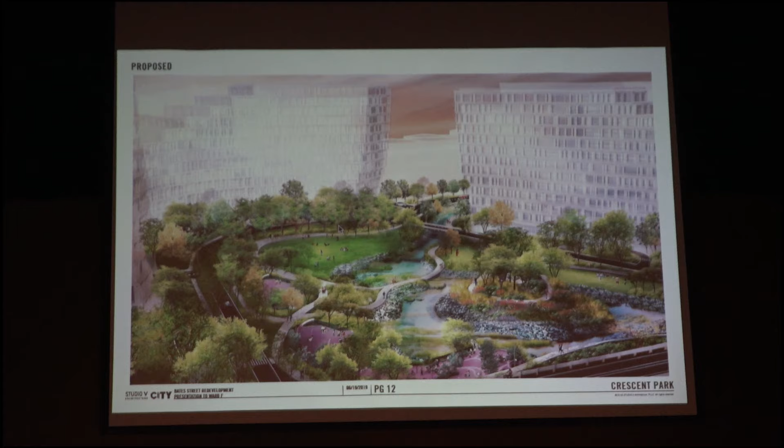Please keep going. Now there are other neighborhoods that are a little further afield. If we look at all of them, there's Paulus Hook, which also has some of these historic characteristics and comes up towards the waterfront and so forth. So we really try to look at each of these communities, and one of the most important things in my practice and designs -- I'm glad to talk with you afterwards, answer questions, show you other examples, go to our website -- is that we do a lot of work reconnecting communities, taking edges, taking gaps, and reconnecting them. That's what we'd like to do here, and what we've been asked to do.

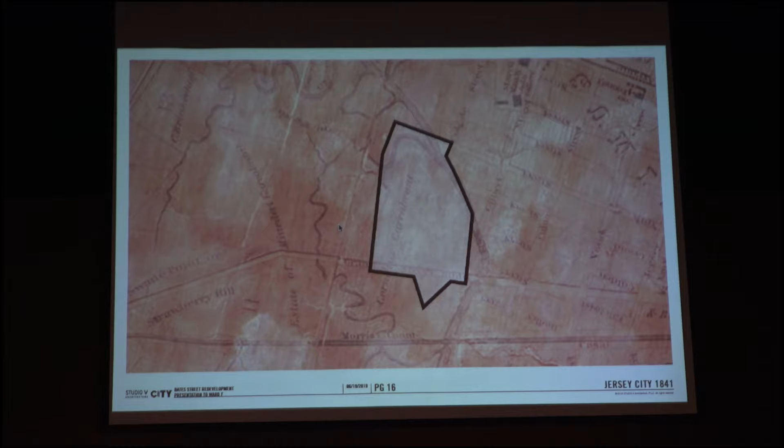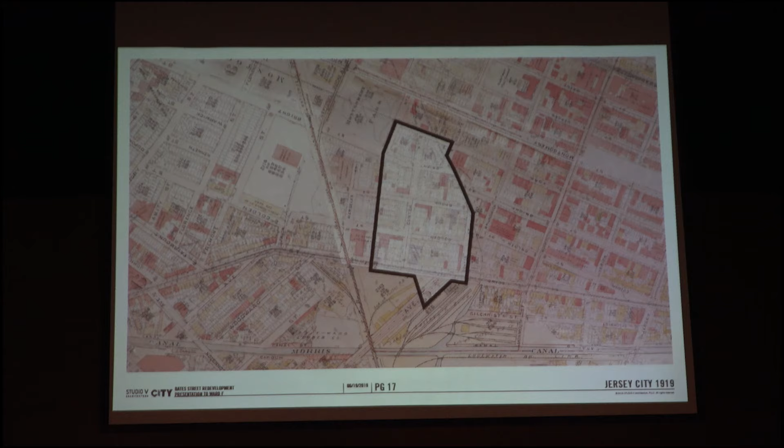So we look at the history. This is Jersey City in 1841, and this site used to be kind of on the edge of the city. As a matter of fact, 8th Street was where the Mill Creek used to be, so it actually used to be a waterway. Keep going, Olivia. Then by 1919, the fabric of the city went right through -- it used to be connected. The blocks went right through, and the fabric of the houses and buildings actually continued through continuously.

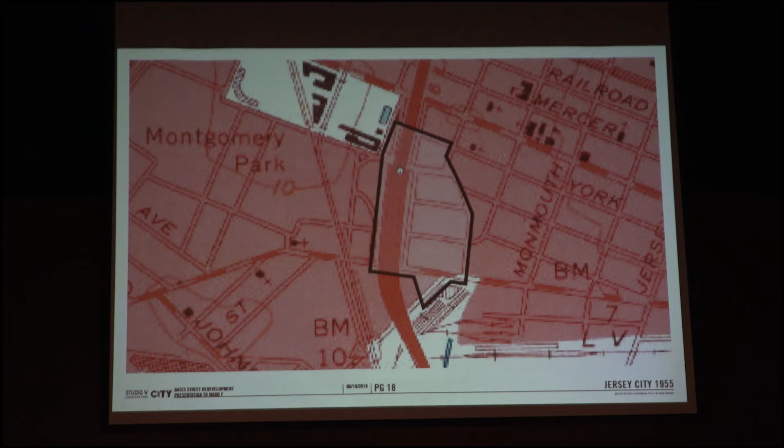Now, by the time we get to 1955, there's a significant park in the upper portion. The park looks kind of white -- actually the park moved a few times. You'd be amazed, this is post-war, where a lot of things shifted. And by the time I get to 1980, right?

They built the highway, the thruway, and that started to cut the neighborhood apart. They also put the park there. The park is a good thing in many ways, but now suddenly you have the park and then you have the highway. And so this started to kind of cut the neighborhood in half, although historically, for over 100 years, or I guess for more than half a century, it was really connected together.

And many times, as planners, as architects, we look at how infrastructure moves were often made in the 60s and 70s, where they put infrastructure that divided neighborhoods. It often divided neighborhoods of color. It's a very important thing. So a lot of our work is about trying to figure out how to reconnect that.

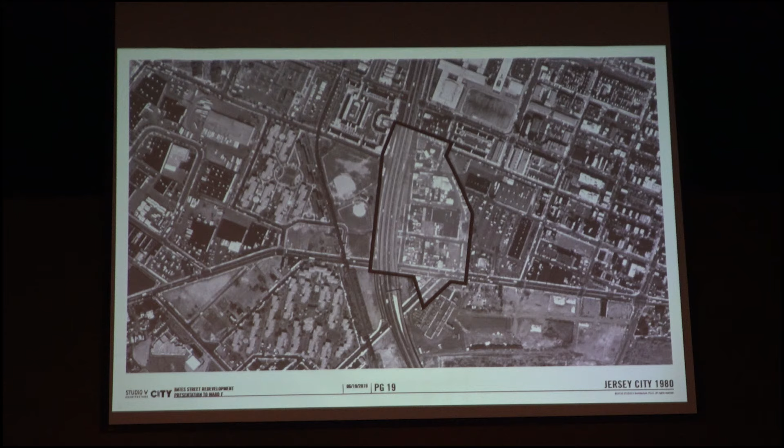And I can't remove the highway, I can't demolish that, and there's many reasons why you need it. But we can do other things that start to reconnect it together. So I look at the history, and I look at all of our designers, look at the character of a place, and we try to understand that to make it better.

A lot of times when you build this infrastructure, like a highway, you kind of create an edge in the middle of the city, and oftentimes that becomes, as the woman described earlier, an industrial zone. This is the outline of the redevelopment area, and many times it becomes kind of an industrial area because it backs up against a thruway, and an area that used to be full of homes and shops and parks suddenly becomes kind of an industrial area. And then in many parts of that area, there are a few people who live there, and we recognize and acknowledge that, but many parts of it become run down or maybe underutilized, and it stayed that way for a long time. And it started to create a division within the neighborhood.

So then it's divided, the Bates Street redevelopment area. Again, this is something that the city did years ago, and we're working with it. The right-hand side shows a mixed-use district. So this area here, thank you, Frida. This area is actually the residential area, and then there's open space, which is actually under the kind of highway area. And so this is part of it. So this defines what we're working with. And there's also a little triangle down here, which has a gas station.

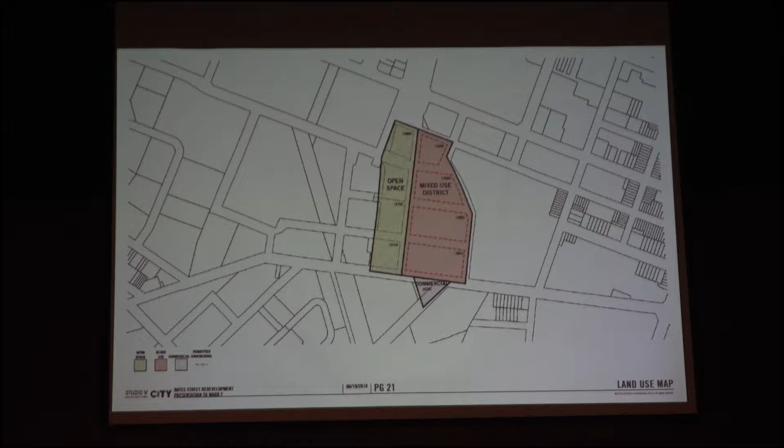Okay, so this is how it's laid out today. Let's go to the next. So now the current site conditions, and this was kind of profound for me when we started working on this. I didn't really get this until we studied it.

They did all that in 2005, and you know what happened? Almost nothing. And that's a terrible failure. When you're a planner, when you do all this work, when these other folks did it, who meant well by it, who intended it to succeed, they wanted it to rejuvenate this neighborhood, but it must not have been done correctly. And when you do a rezoning, and I do many of them, when you do master plans, when you try to connect together communities, when nothing happens, it tells you that you did it wrong.

And now we got to figure out how we can do it right. Go to the next slide, please.

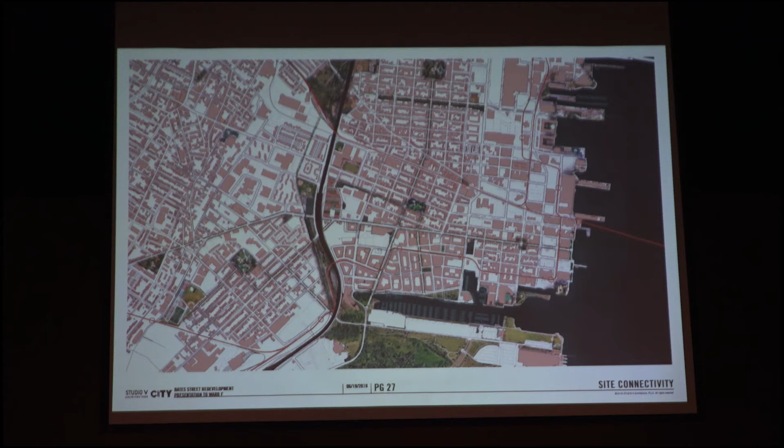We go to the next. So this is kind of a close-up that shows some of that area, and it shows it built out in the future when Liberty Harbor North, which is underway right now, and many of these buildings are done, but others are coming, and you can start to see the connections.

And we want to make connections under the thruway. We want to take those areas that today are blank and gravel and fenced off, and create lighting, create landscape, create some improvements, if state DOT will work with us, and we're going to try very hard to work with them.

So I think that there are many examples. Sorry, we're not going to do questions in the middle, but if you do have a question, just note this slide. I just want to make sure we get through the whole thing.

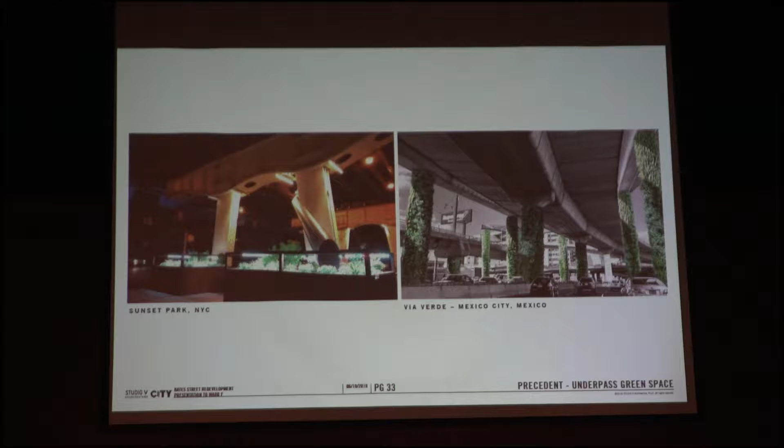But I also want to talk about other tangible community benefits that I'm going to come back to, like that recreation center and other things, because those are much more solid. We can actually really plan for those and do those if that's what everybody agrees to. But we definitely want to try to make a connection under the thruway too.

So open space and recreation improvements, let's talk about it a little bit. Currently, committed under the Bates Street Redevelopment Plan is about $2.8 million. Proposed, what we're talking about, and there's more information here, because we wanted to come back to you with real numbers, real facts, real metrics, recording this so that everyone could hear, because this is what's under discussion.

It's important to do this in an open and transparent manner. We're talking about adding another proposed $11 million of funding, with additional funding of about $8.1 to $8.2 million for open space and recreation funds.

Now again, I'm an architect, I don't decide where every bit of that goes. We work with your elected officials, your community leaders, your community groups. But let's talk about some of the places where that could go.

Some potential uses for that include improvements under the New Jersey Turnpike underpass. If DOT will work with us, we'd like to put in lighting and some artwork, because that'll create a much better connection between the South End and Van Vorst. That's important, but there are also other things that are more controllable.

For example, a potential spray park in Booker T. Washington. When you talk to the Booker T community, you could create something for the children there, something to cool them off in the summer. That could be very nice. There are other examples of that in the city.

In addition, we're talking about improvements to the Booker T. Washington basketball courts. There are similar conditions over in Hamilton Park that people are enjoying, so these are things we could do.

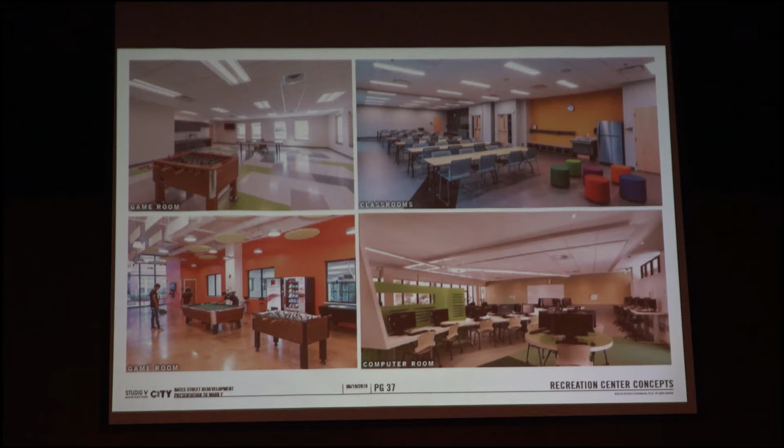Building a really state-of-the-art recreation center could be fantastic. These are some examples of how we look at that, where they can contain classrooms and game rooms, computer rooms, educational facilities, and these can have profound impacts on communities and on youth, as you heard some of the other speakers talk about.

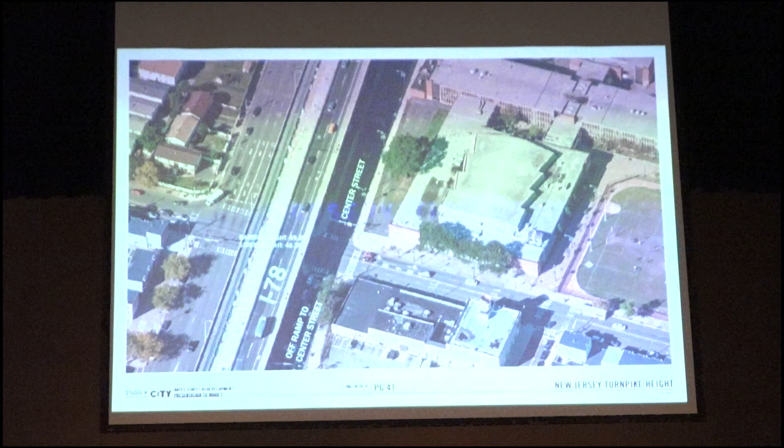So, preservation of the view corridor. This is an interesting concept, because how can we create visual connectivity, view corridors, between the two communities? This today is a photograph that shows an aerial view of the elevated turnpike. You can see it right here, and you can see how the streets pass underneath it.

Next. Now this is a view that we've generated. We use these computers and we draw stuff. In the existing redevelopment plan that predated us, the one from 2005 that wasn't built out, they showed basically an approved base height of about 125 feet, so that's about 12 stories. Basically they're saying you can build a continuous wall of 12-story buildings immediately adjacent to the thruway.

So what our thinking is, that's really kind of a wall between two communities, it doesn't create any view corridors. A greater and more varied building experience would allow us to create more distinct view corridors. Instead of that, we're proposing this, where you could have some taller buildings - and they are taller, we're not hiding behind that - mixed with a series of lower buildings. There are those 4-story buildings with townhouses, where I can take these narrower streets, make them wider, make gardens, open up the view corridors, and push some of that height a little bit higher so that you can really see passages through.

And frankly, it's inspired by some of those beautiful neighborhoods and older parks and things in the South End, Van Vorst, and Paulus Hook. These are classic Jersey City housing types. I'll show you some pictures and examples of that so you can be the judge yourself. That was page 42 and 43.

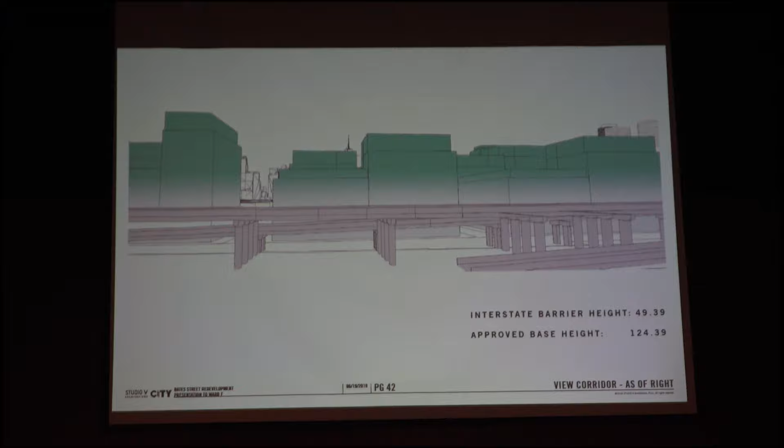So I used their criteria, their diagrams to create this computer-generated image. Felita created it. Then this is the next one that shows where you have some greater height with view corridors between. But we were asked, can you show that from the street level? Can you show the difference there?

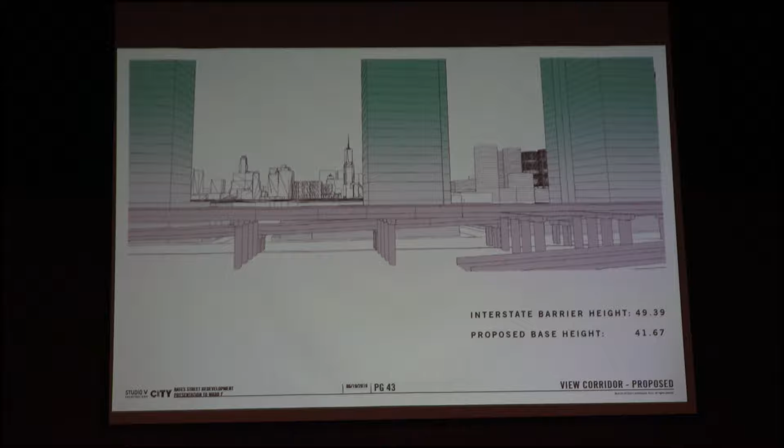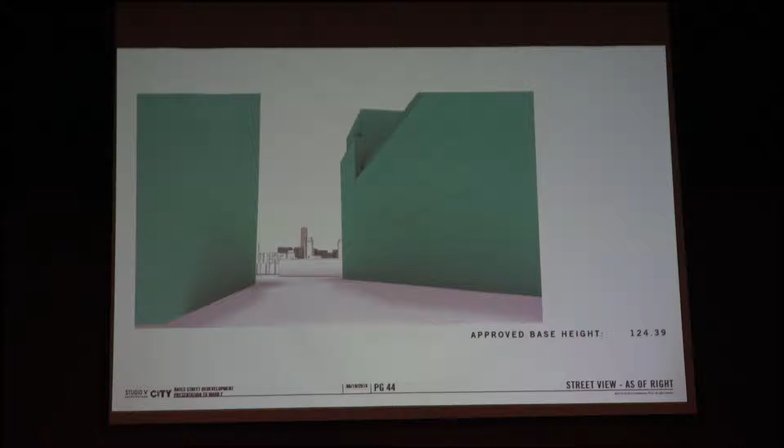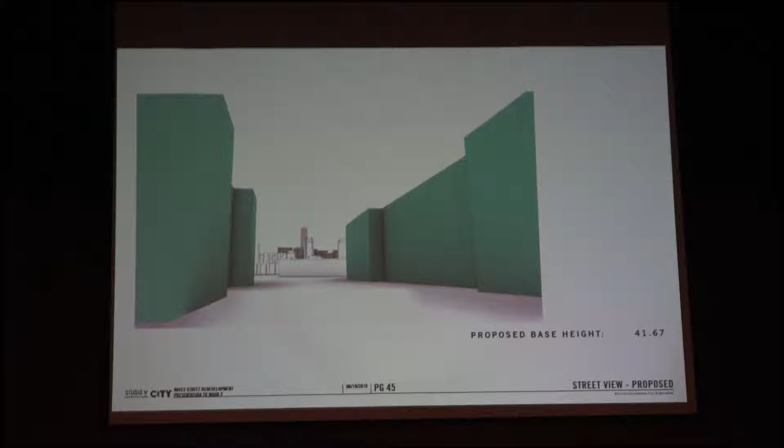So Felita did a new drawing. This is as-of-right with the very tall ones, and you can see how it works out, with some taller buildings set back. Instead of that, we're proposing this, which is lower, set back, widening the streets, putting in gardens. This is just the diagram, but it shows the contrast between existing today, what could happen, and what we're proposing going forward, lowering this. Part of being smart in planning is making some things lower and more open, and some things taller, so it's more varied, making the right choices to improve the view corridor.

Now a lot of people have asked about the units, the sizes, and the types, and it's complex. So I want to go on the record and share all that, be transparent, make sure we get it all out in the open, and answer your questions.

So the as-of-right scheme allows 900 units maximum intensity with the bonus—I can get into that in detail—but basically there are provisions within the plan that allow it to max out at about 900 units. It's even more complex, because that's the number of units, but the actual bulk, meaning the building envelope, the volume of the buildings dictated by the plan, actually allows up to the equivalent of over 1,600 units. As a matter of fact, other developers, when I previously looked at it, it would have allowed even larger areas, filling that up with storage or other things, making it appear much bigger. But the units based on maximum density are limited to 900.

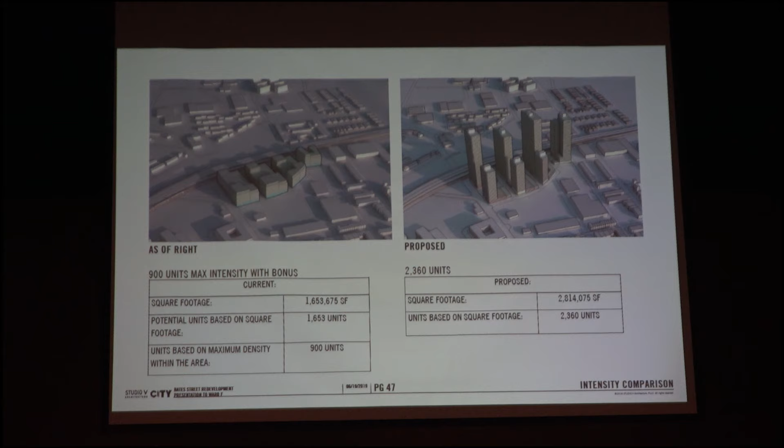Access to this part of Jersey City, we're about half a mile to the train, and that's considered absolutely, in planning terms, a transit-oriented site. It's a short walk, about an 8-minute walk, which puts it well within the range of transit. So tower heights going up to 50 or 60 stories are very commensurate with other developments throughout this area that have similar access to mass transit.

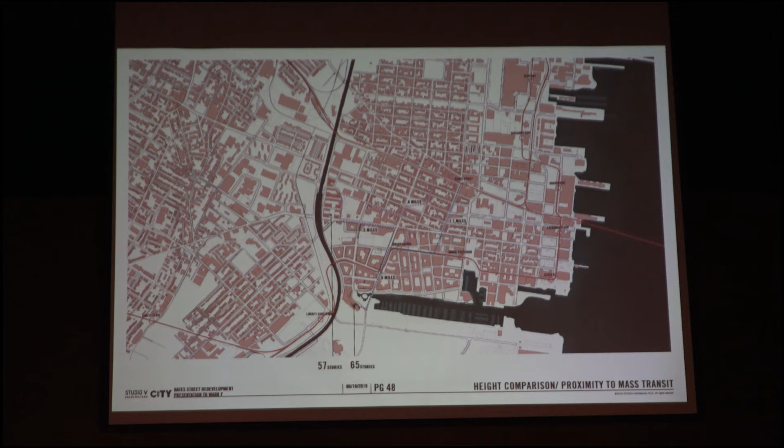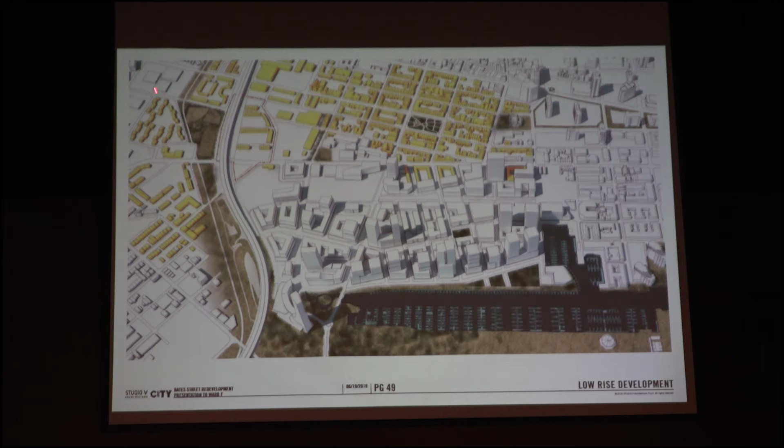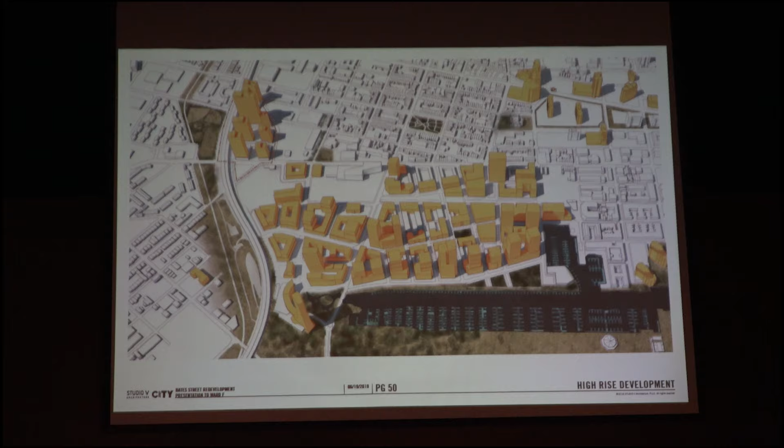This shows the idea of two types of development, low-rise and high-rise. Here you see the low-rise development in Van Vorst, and the low-rise development on the south side of town. And you see the low-rise development we're proposing passing through the site. The next slide shows the taller towers, where all of these areas also have tall towers. So we're combining these two types, slender towers with open space, light and air in between them, and lower buildings to create connectivity as well as community benefits.

This is a shadow study. We do these computer drawings and look at where the sun comes from, starting very early in the morning and working its way into the afternoon. You can see the timeframe on the right, where we calculate and show how shadows work. We can play this again and I'll come back to it.

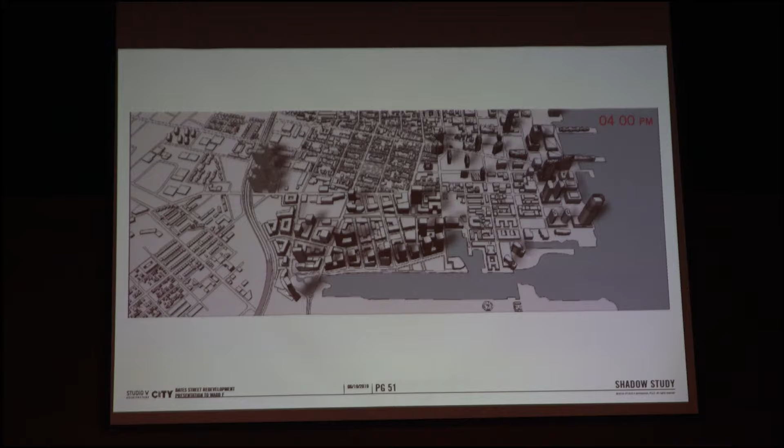This is slide 51. The interesting thing, because we want to be careful about shadows on parks, is we looked into this too. The good news is it does create a little bit of a shadow onto Gateway Park, although you already have the huge elevated highway looming over it. So that shadow is cast very early in the morning, basically 6am in the summer, when the park is really not in use.

By the time you get into the middle of the day, or even the latter part of the morning, when all the people are using the park, it's completely free and clear in the sun. It does not shade any other parks, including Van Vorst, which is way too far away and has no impact on it whatsoever. This is important, and we can come back and show you this. It's important to us to make sure we look at the effects of light and shadow.

Next. You get stuck on that for a second. Where we go. Okay.

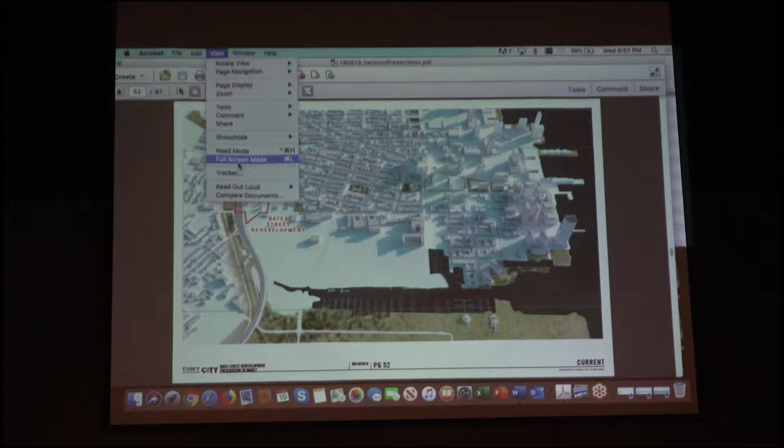Thank you, Kula. So now this shows what's currently built out, and this shows the full proposal. Let's talk a little bit about units per acre, since there was some question about that. The current development plan we're showing is an increase, a change in the number of units per acre, and it's important that people have asked about that.

The existing plan is about 156 units per acre. That's the one that nobody built anything for 14 years and it failed, but it was 156. The current plan, as we're showing it, would be higher, about 400 units per acre. It's important to point that out.

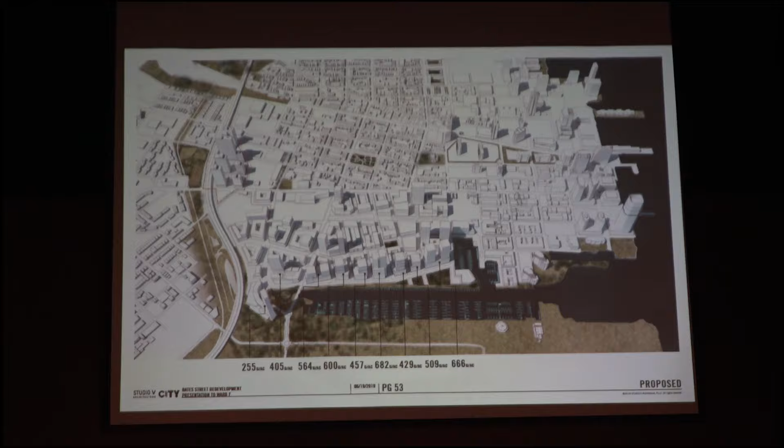As part of that, we looked at all the surrounding developments around us, and I want to point out these numbers: 666, 509, 429, 682, 457, 600, 564, 405. My point here is that we're proposing about 400, which is commensurate and less than most of the other surrounding dense developments that have access to transit. It's important that we look at these measures and do the appropriate studies to show how it works relative to mass transit and how it's appropriate relative to density.

Next, infrastructure. This is one of the key points, and when we get into the Q&A, we have a great civil engineer here who's worked on this plan. He's going to help answer it, but I'm going to start presenting it because infrastructure is a big deal with this site. Now, I deal a lot with resiliency and flooding.

I just came back from the city of Miami, where I met with Mayor Suarez and actually worked for free for one week with the Urban Land Institute to help develop an entire resiliency plan for the city of Miami. I'm also working, having been appointed by the Mayor of New York City, to write the waterfront plan for New York City for the next 10 years, from 2020 to 2030. I'm on a board of 18 people that were appointed, and I'm the only architect appointed to it.

This is a topic I know a lot about, that I care deeply about, and that affects many people and many communities. It's a problem. Our cities are flooding, many areas are flooding, and this neighborhood absolutely faces this challenge. Jersey City in particular faces some very difficult challenges.

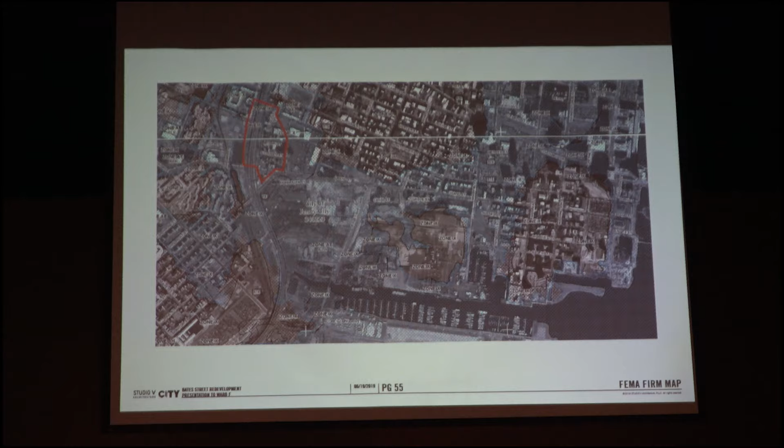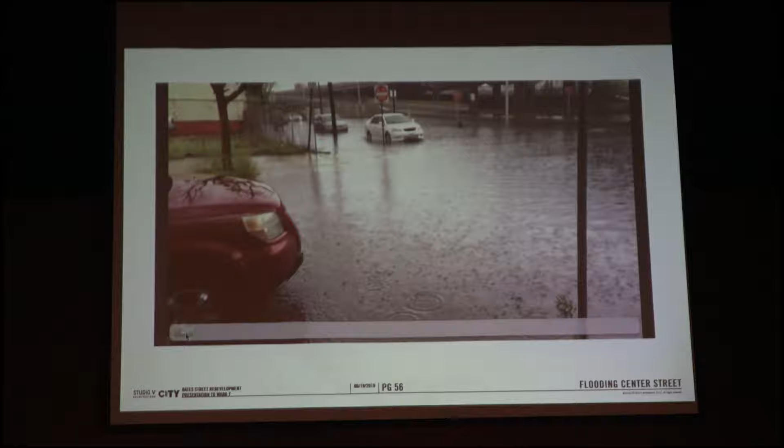So I'm going to try to get into that. This is a video that was posted by one of the residents that shows the street. It was also raised that some improvements have been made, but they haven't actually renovated the stormwater system here. They merely cleaned it out, which made it work a little better.

But this is a diagram that shows the streets here. There was some question, but there is no question that the entire Bates Street site is absolutely in the floodplain, up to 3 feet. So when the next Sandy comes, and it will come, this site will be flooded with 3 feet of water, not 6 inches, not 8 inches.

In a major storm surge such as Sandy, and I experienced that when I lived in Manhattan, took my kids out into it, this site is about 4 feet in the floodplain. It will flood 3 to 4 feet, and many of you have experienced it. That's not an opinion, that's a fact. Those are the federal FEMA flood maps, and we've already experienced it. So we have to address this.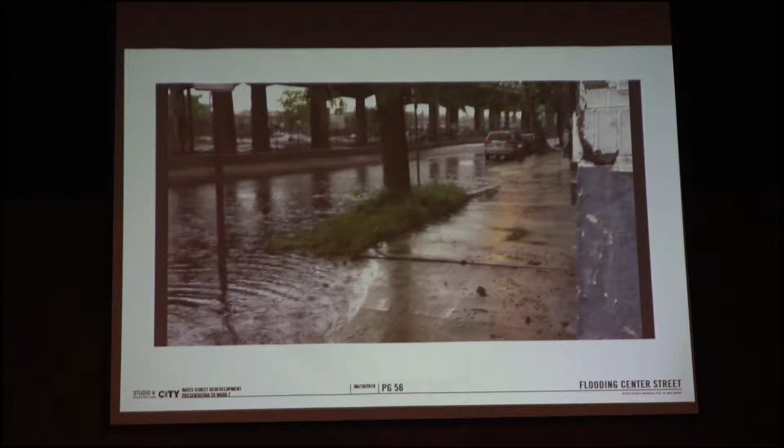Now there's one piece of good news. The good news is that when you have a site like this where there is so little development, and there is some development, a few people there, I want to be careful, but the vast majority of it, and with all the major property owners supporting this scheme, we have an opportunity that is rare, that we hardly ever get to do, that a city can rarely do. That opportunity is we can redevelop the entire infrastructure of this site because it has so little infrastructure, because it's so poorly served, and we can elevate the whole site.

When I say elevated, we're elevating about 3 or 4 feet. It gently slopes up, like a slope you have all the time. It's fully accessible, you can hardly notice it, you just walk up it. But we can elevate the whole 4 blocks. We're doing this on many other projects where we can, but it's rare to be able to do it for 4 blocks. It's only because these 4 blocks are so blighted and so largely empty that you have the opportunity to lift it up.

And it's actually the best solution, one of the only moments you can do it. When you lift it up, this may not be something all of you know, the utilities have to be just underneath the soil. They can't be deeper, you can't put 4 feet of new soil on top. So actually you have to rebuild all the utilities, which is normally so expensive, but there are so few utilities here, and they're so outdated, that we can do both: elevate the site and rebuild the entire utilities of the site, and solve it forever. This is a big point.

This is a special assessment district. All the property owners will sign the special assessment agreement. The roads would be raised to prevent flooding. We've already looked at the civil engineering, it gently slopes up, it's not like it's on stilts, it's just this very gentle rise, and it's perfect because it lifts up the whole site. We separate the combined sewer into 2 systems. If you don't know what that means, today the sewer system, and this is a problem, is combined with the stormwater system.

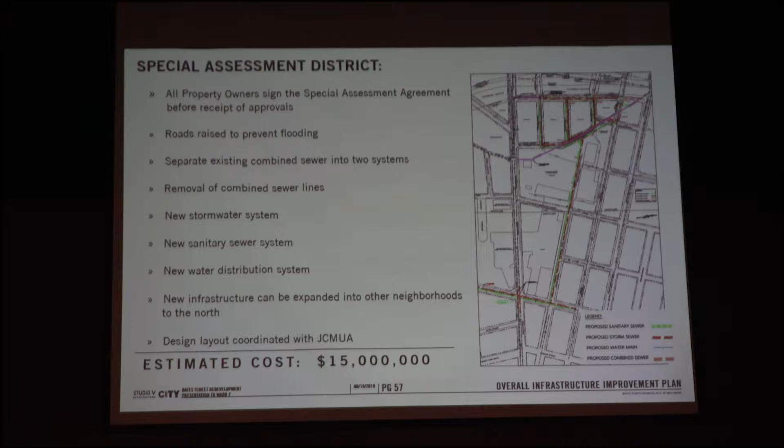I'm glad to answer questions on that, if you guys have any. What was the slide number on that one? That's 57. Thank you, Felipe.

Let's get to the end of it because I want to make sure I have time to answer your guys' questions. So Manhattan Building Company is the overall developer, and then there are a series of sub-developers under them, as you've heard, that can develop individual parcels.

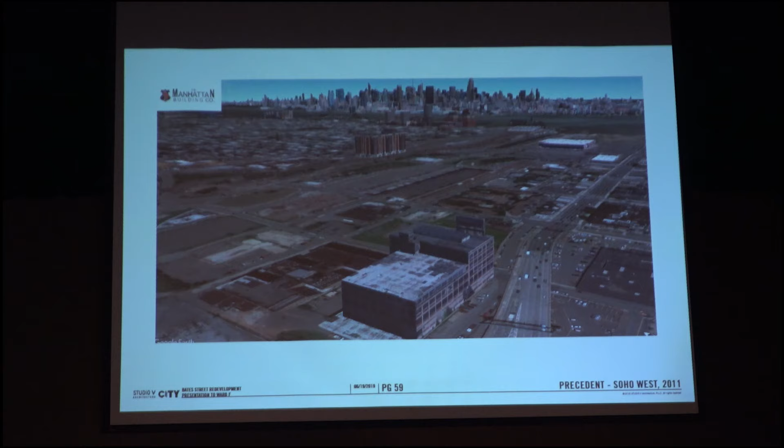I work with a lot of developers, and not all developers are real, I gotta tell you. But these guys have definitely built a lot of buildings, and by the way, they suffered some of the same problems where these buildings were also in the floodplain, and they lifted them all up and elevated them the same way. Unfortunately, they didn't have the opportunity of doing it all at once to lift the streets, so they had to elevate the sidewalks, which isn't as good but still works—that was the only choice they had here. We can actually do an even better job in Bates Street by elevating the streets, which is the better way to do it, and what they wanted to do and proposed.

That's good news, and it really shows examples of how they've done significant new residential communities and development, including low-rise as well as some of the taller buildings. Next, a vision for the neighborhood.

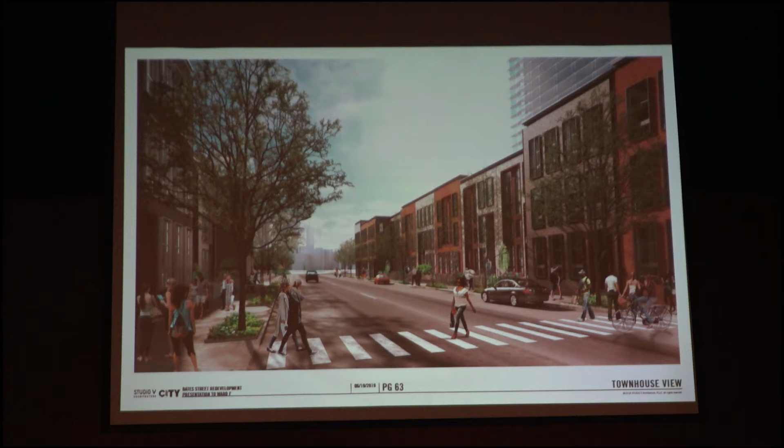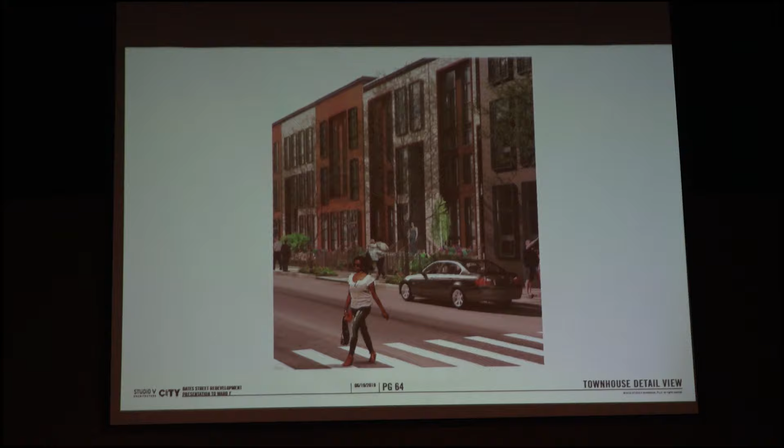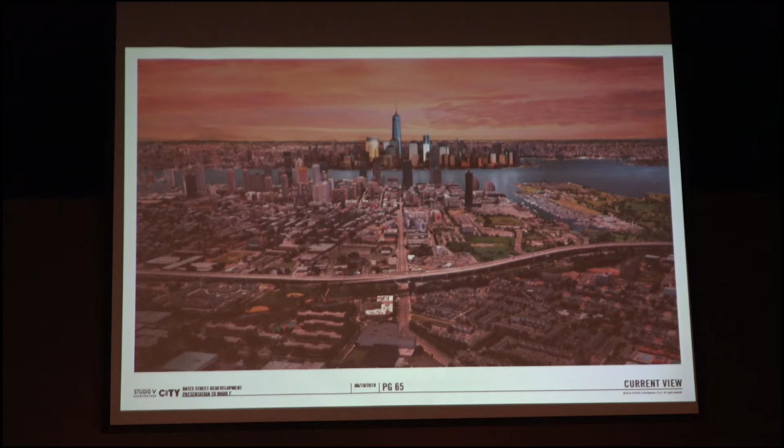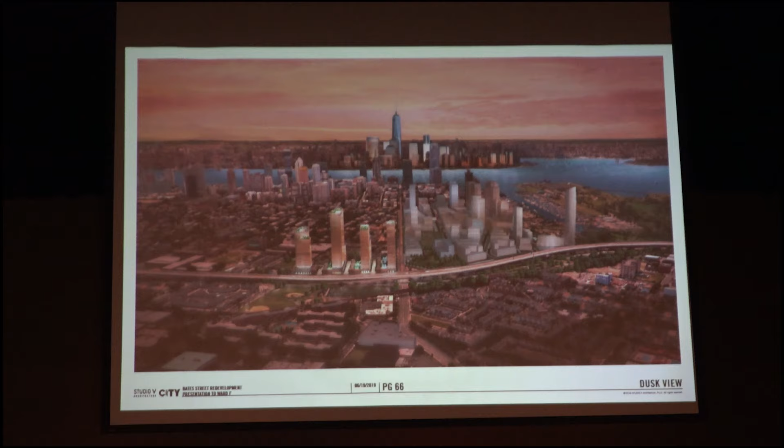These are some details that show it up close a little bit, starting to show this connectivity, where you can see how we want to make these paths in between, how we want to do the lower buildings, and how the taller buildings are separated to allow more views between them.

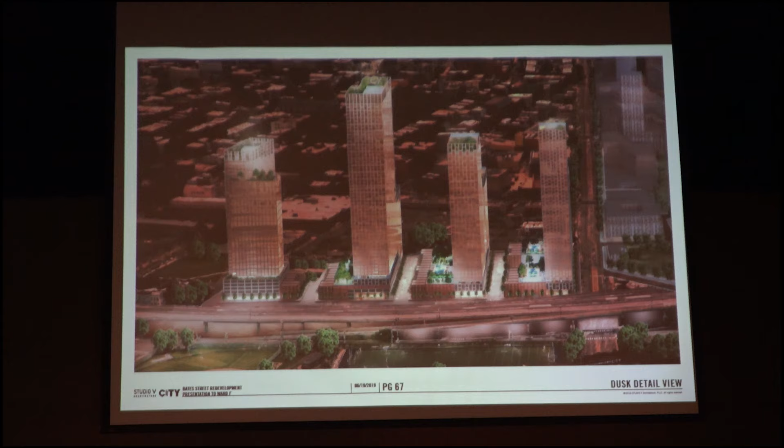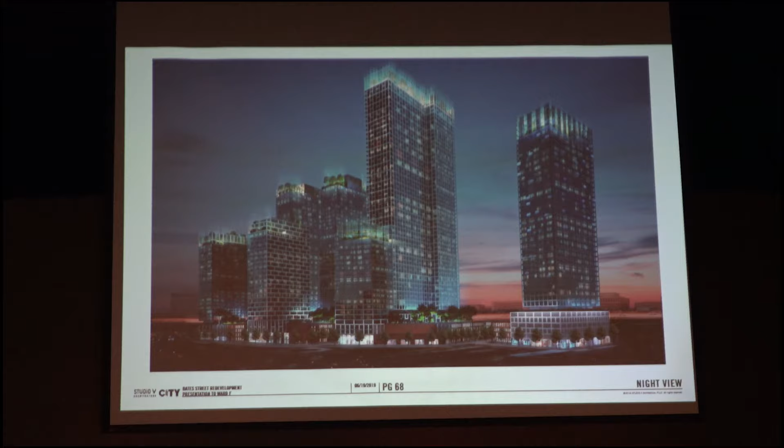Next, this is a view of the development. We'd like to do a very high-quality development with great architecture, great public spaces, great gardens. This is a view of it at night, where again you have parking garages built in.

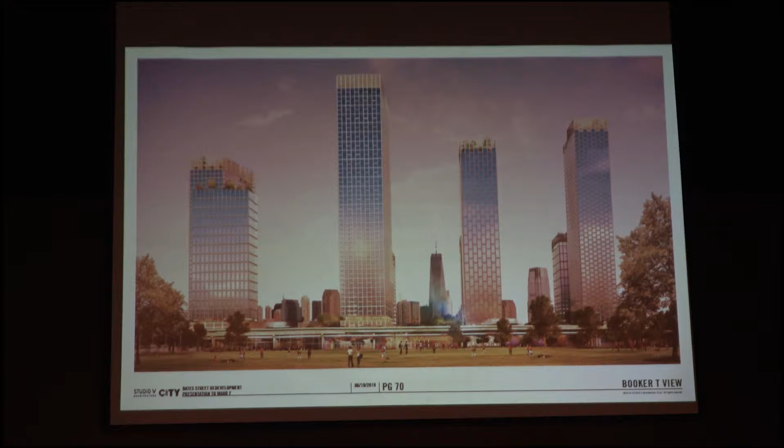The parking is tucked behind those townhouses, and you have beautiful gardens up above. This is a view from Booker T, showing the openings between the buildings, and instead of a continuous wall, you get openings, views, and connections between the buildings. Here is that view corridor as of right that we showed you before, and here is what it could be instead.

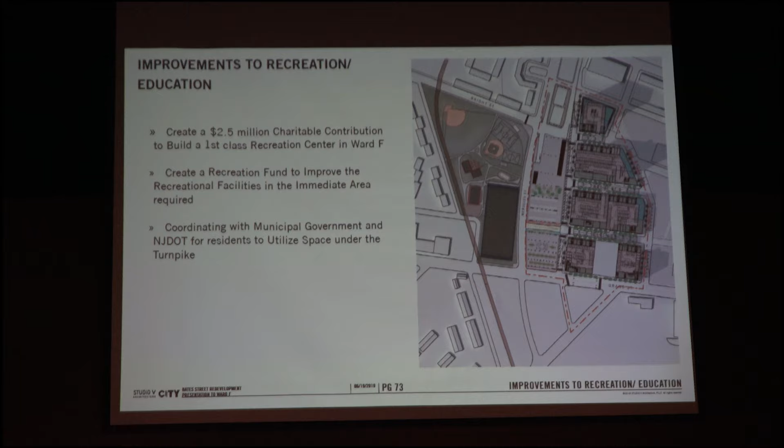So, value-added incentives for Ward F—I'm near the end. These are some of the things proposed. Number one: build a $2.5 million charitable contribution to create a first-class recreation center in Ward F. Create a recreation fund to improve the facilities in the immediate area, and coordinate with the government and New Jersey Department of Transportation to utilize space under the Turnpike. All three of these things are on the table.

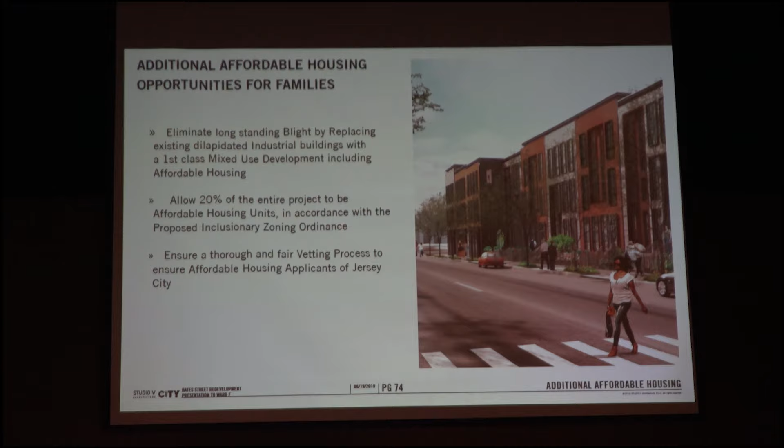Additional affordable housing opportunities for families. Eliminate long-standing blight by replacing existing dilapidated buildings with a first-class development, including affordable housing. A lot of our projects in New York—this is a new thing—we're doing percentages of affordable housing. This project would have 20% of the entire project as affordable housing units, in accordance with the proposed inclusionary zoning ordinance, and ensure a thorough and fair vetting process to make sure affordable housing applicants are the right people and appropriate for the project. So, 20% affordable housing.

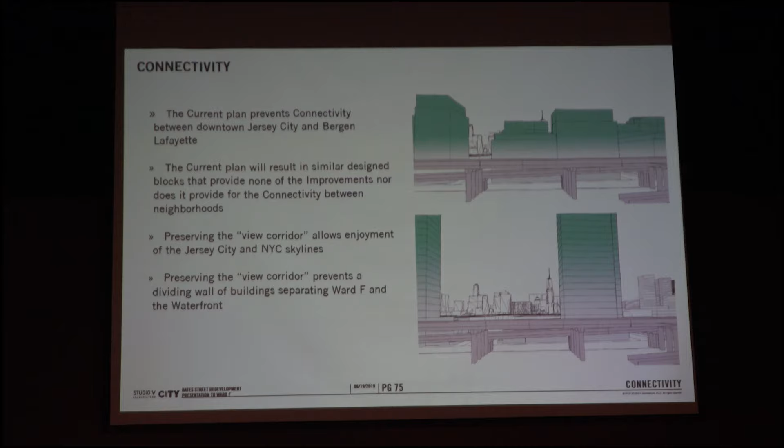Connectivity: the current plan kind of prevents that connectivity. We feel it doesn't address it at all, and it failed to be built out. So we want to create these connections, the view corridors, and so forth, with more slender buildings that allow light and air views in between. The infrastructure improvements include contributing $15 million to rebuild the failing sewer infrastructure, raise the street level, create this kind of brownstone residential character and streetscape, and also support the city's Vision Zero pedestrian safety initiative with new sidewalk extensions and new street lighting—a very sustainable and ecological approach.

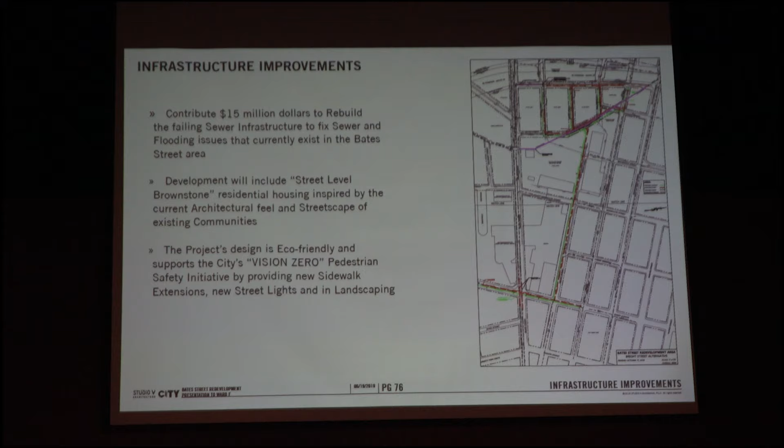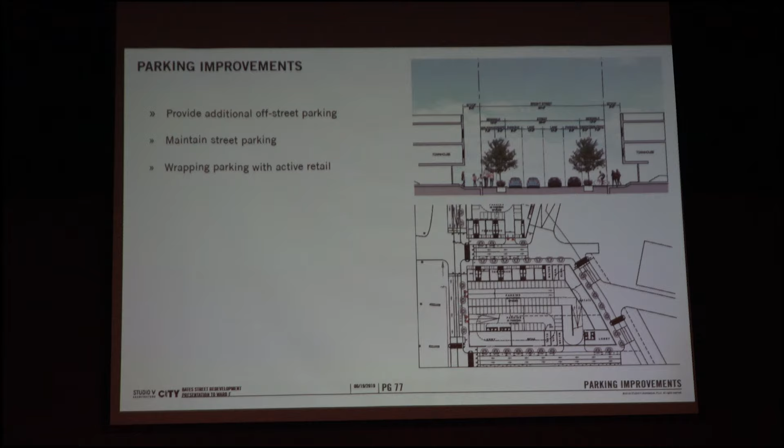Minority contractor and labor participation: the project is committed to providing job opportunities for local minority contractors, skilled laborers, and apprenticeship workers. It's committed to providing job opportunities for minorities in long-term construction contracts and jobs, property maintenance, landscapers, doormen, and cleaning services. The developer is committed and representing publicly, on the record, that they will provide opportunity for independent compliance entities to interface with the Jersey City Office of Diversity and Inclusion, because it has to be done right. That's on the table.

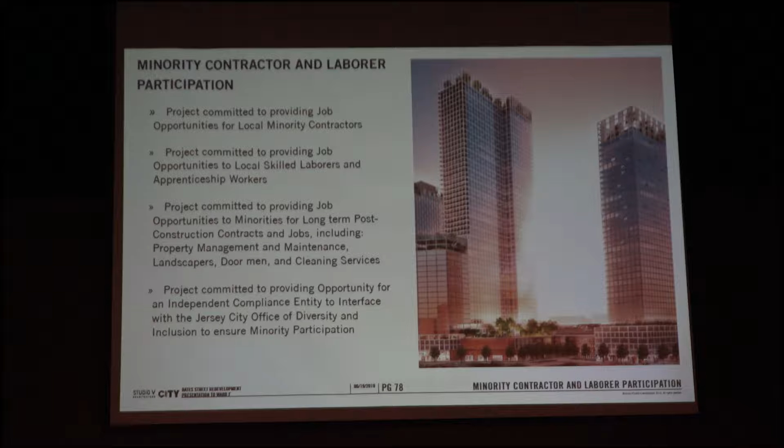So, I think we get to the Q&A—there were a couple of questions we were asked, and then we'll do an open Q&A with the rest of you. One was: how does the proposed height and density of the project compare to other projects that are approved or constructed?

These show some of those issues. So how does it compare? I went through this and showed some of the densities, how our project is commensurate with other transit-oriented developments—actually less than almost all of Liberty Harbor North, which is at densities of 500 to 600, maybe down to about 420. So we're really looking at something in the range of 400.

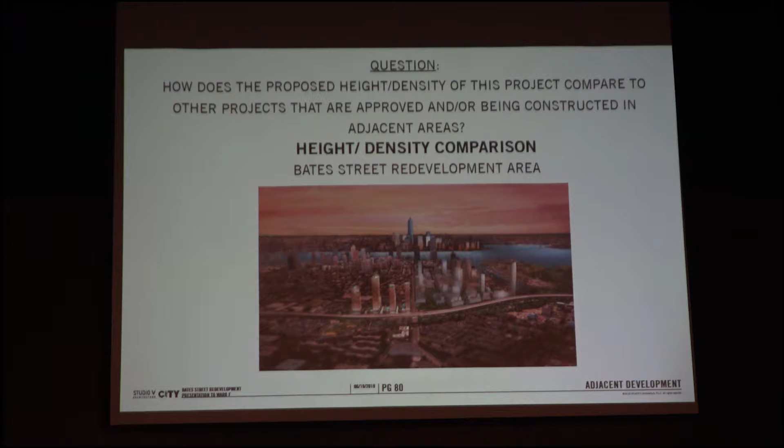The exact unit counts might change a little bit, but this is what we've talked about. The heights and so forth are also commensurate with those of other surrounding approved redevelopment areas.

How does the proposed parking ratio compare to the Bates Street area? We proposed 0.5 cars per unit. It is a transit-oriented site. The maximum allowed is up to 1 per unit.

Looking at other examples, the Grand Jersey development, approved right nearby, has no minimum, but it's up to 0.75, so a lower percentage. Liberty Harbor North, Enos Jones, Jersey Avenue Park are all the exact same thing we're proposing—those are other adjacent developments.

Others, such as the Jersey Avenue Light Rail and Montgomery Street, have the same ratios, and One Exchange Place actually doesn't allow parking. So really, we are providing the same or more than all of the other adjacent developments. It is a transit-oriented development.

What tax abatements are proposed for this project? This is a key point. The answer is none. That's a big deal, because tax abatements are where the money goes away as an incentive to the developer.

For example, look at revenue for the schools. Currently, revenue from this site on a tax basis is about $550,000. That's remarkably low. Because this site has seen so little development for so many years, it is unbelievably unproductive and doing almost nothing for the city and the community. That's the problem right there.

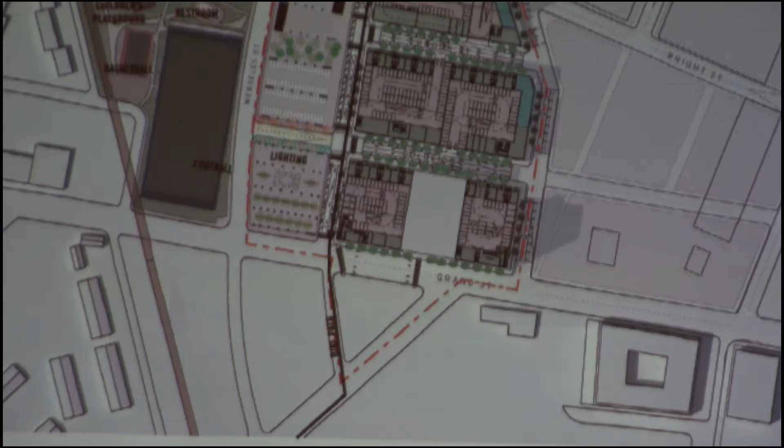No, actually your property rights will be increased, because right now the redevelopment plan, the way it reads, says the block you're on, 13801, needs to be developed as one cohesive block, or else we have no development rights to that block. What we're proposing is to remove that language, allowing single-family homeowners—there's only 3 owner-occupied houses in the area—the ability to develop their property if they'd like to. The first step would be to reach out to the Jersey City Redevelopment Agency and ask for a redevelopment application for the ability to develop the property.

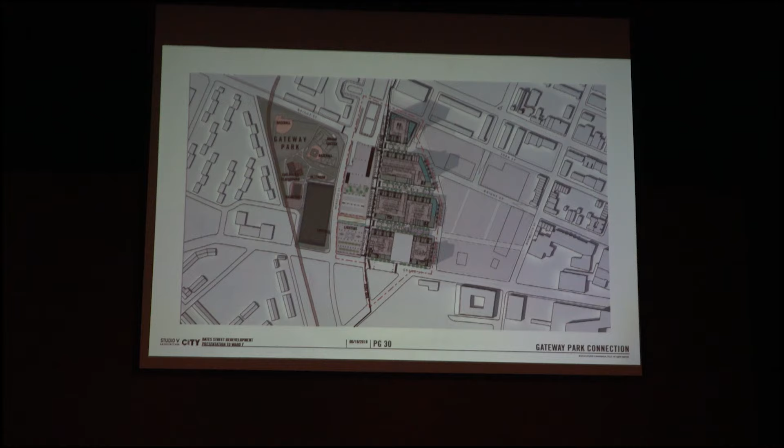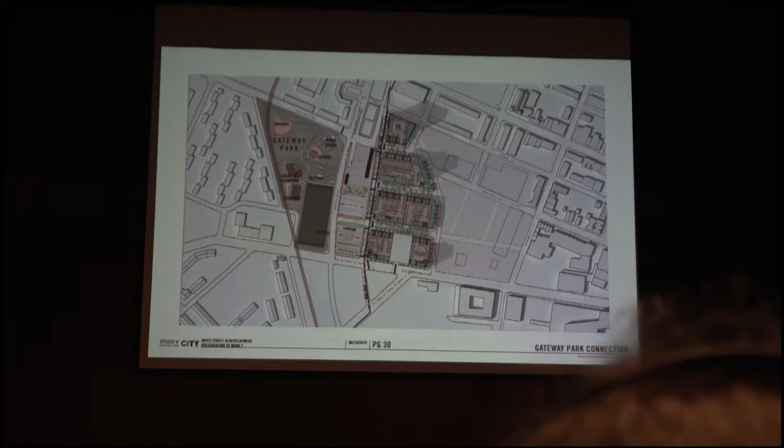This next question I'm going to read, however it was answered in the packet being handed out. Again, if you don't have a packet, please raise your hand. We have one young lady over here who didn't receive a packet. The question was: what about school impact? How many students, and the traffic impact for the area around the schools? That question, I believe, is on page... I think it's 4. Yep, it's at the bottom of the first page.

Next question: can you please elaborate on the types of permanent jobs you plan to create for local residents?

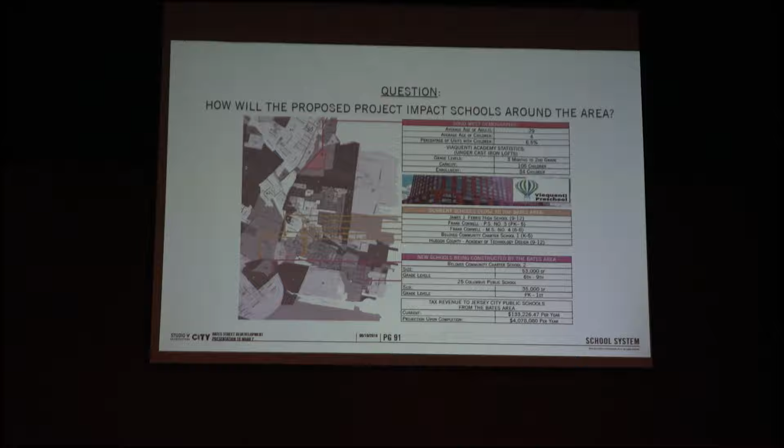What we're looking to do is, number one, create an apprenticeship program for construction jobs within the area. This is a program where we'll not only provide jobs but training, because there's a very big need for local and skilled contractors. So we'll create the apprenticeship program and train contractors to have long-term construction jobs. I understand this is a very big vision and project—it's 2,000 units—but you need to understand this will be phased over a 10-year project. So that's 10 years worth of work, 10 years worth of local job opportunities. Manhattan Building Company is known throughout the city to hire locally. I work for Manhattan Building Company, I live in Jersey City. Here's our lead architect, Ron Russell, he lives in Jersey City. It's a very common thing in our company, and we look forward to creating more jobs for the residents of the city and the state as a whole.

So I have a card with 3 questions regarding transit: the PATH trains, the light rail, and buses. That question is also answered in the packet. The next question is... I'm sorry—we got it, after we get through the new questions.

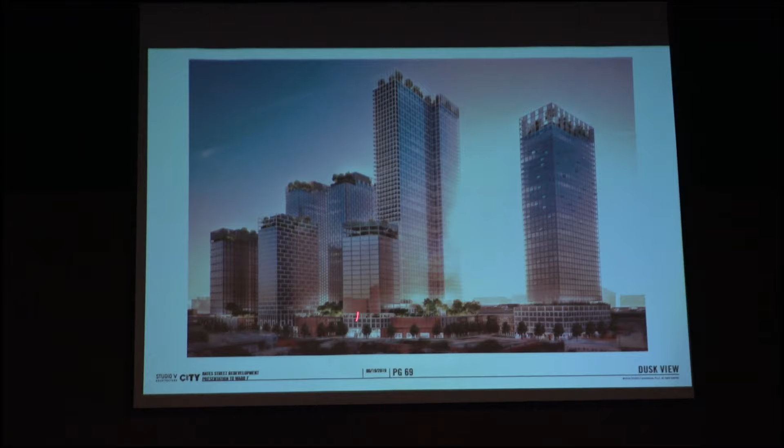Phase 1: Manhattan Building Company has acquired all the property necessary for phase 1 of the project. That tall, slender tower, which Jay did a beautiful job designing, right here, that's phase 1. These other projects will be phase 2, 3, and 4, but everything you see on that slide right now is the entire project, which will be phased over the course of probably the next 8 to 10 years.

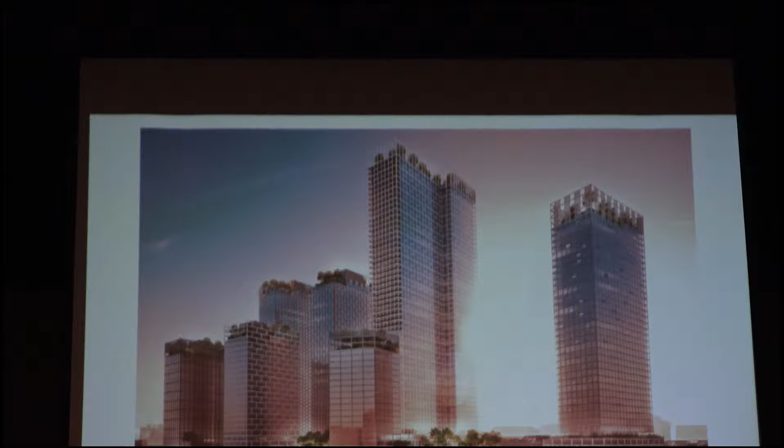We got this question a lot by phone call and email, and we have it again tonight: can this presentation be circulated to the public, and if yes, how? The answer is yes, but the issue is timing.

At Manhattan Building Company, we have a strict policy that we don't distribute the deck and the presentation until we know the direction of the project. As soon as we have clear direction from the planning department, which is the department that will essentially be deciding what goes on in this area, we'd be more than happy to share the presentation with whoever wants to review it.

Next question: will the affordable housing be located within the Bates Street redevelopment site? The short answer to that is yes, but I'll let John elaborate.

The answer is yes for phase 1. As Tony Marchetta just stated, we're proposing 20% on-site affordable housing, which would equate to 115 on-site affordable housing units.

Are there any more question cards?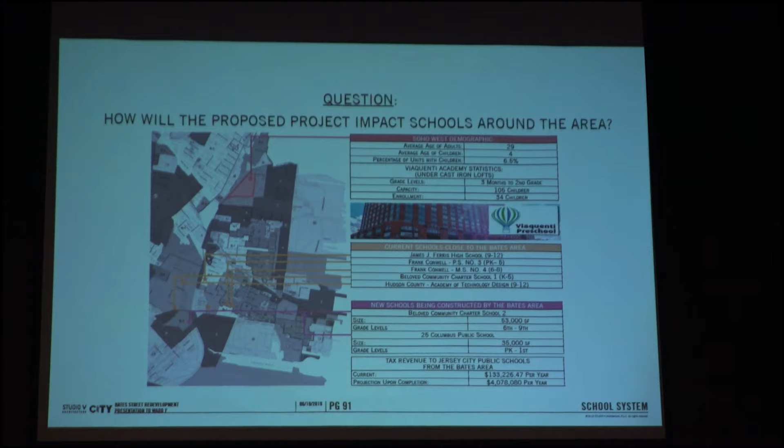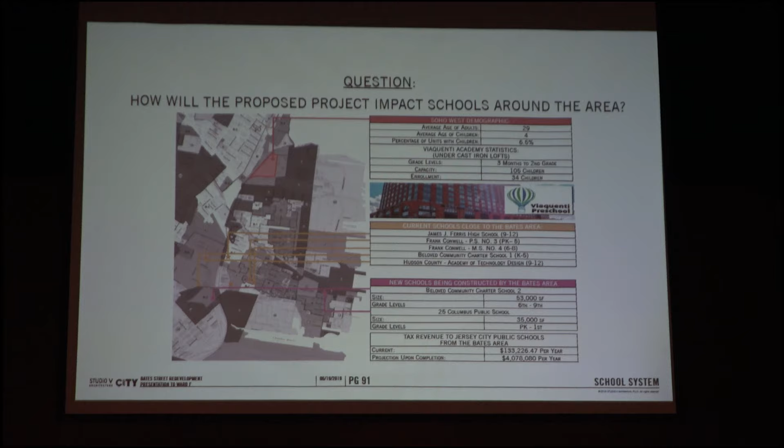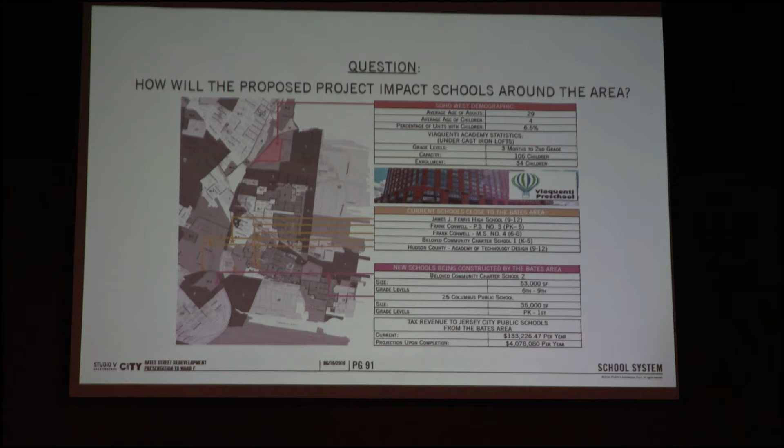Manhattan Building Company is the developer in the Soho West neighborhood. As of right now, we've developed Cast Iron Lofts 1 and 2, as well as the Soho West building. After looking at the numbers, the average age of the resident is 29, the average age of the child is 4, and the average amount of units that are families with children is only 6.5% of the units located within the area.

Under Cast Iron Loft, there's Viaquenti School, a preschool for children from age 3 months all the way up to 2nd grade. I guess the point of this slide is to show you that because of the tenants in the rental building, it seems there isn't as many children in the area. It doesn't have as great an impact as you would think.

Viaquenti, which is the only school that services the Soho West neighborhood, has a capacity of 106 children. When I went to speak to the executive director the other day, she told me that the enrollment there is only 34, so the impact is actually very small.

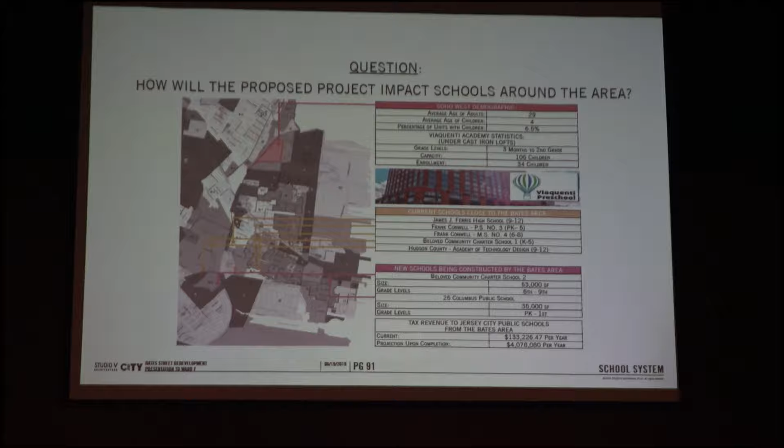We expect the same percentage of units with families with children in the Bates Street redevelopment area. So ultimately, whatever planning and the city council approves, you can estimate an average of 6.5% of those units will include children. Actually, the Bates Street redevelopment area is much better serviced for schools than the Soho West neighborhood.

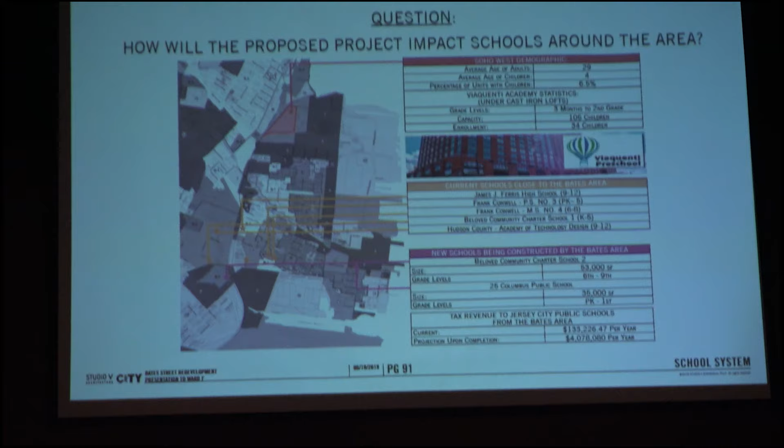You have 5 schools within walking distance, and then you also have 2 new schools coming online, one at 25 Columbus, which is pre-K through first grade. That's 35,000 square feet, which I think will be great to address some of Van Vorst's concerns about overcrowding in the school. Also, the beloved charter school, which is located right here, is opening up their second charter school and expanding, and as you can see, it's very close to the Bates Street redevelopment area and could service it.

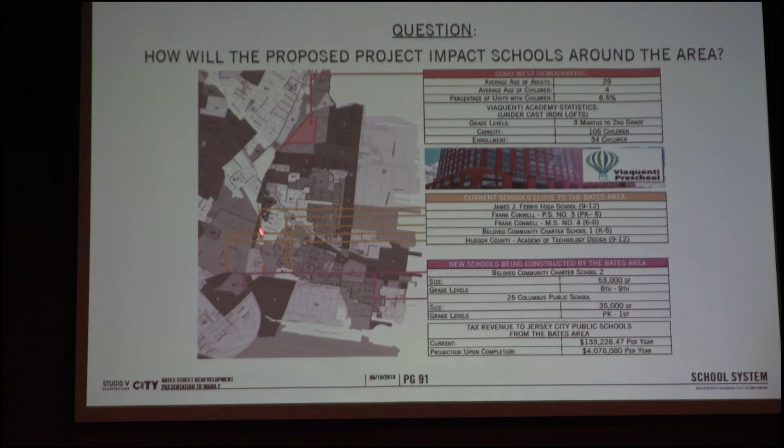If need be, like was done in Cast Iron Lofts, we could do something similar to Viaquenti on one of the sites located within the Bates Street redevelopment area.

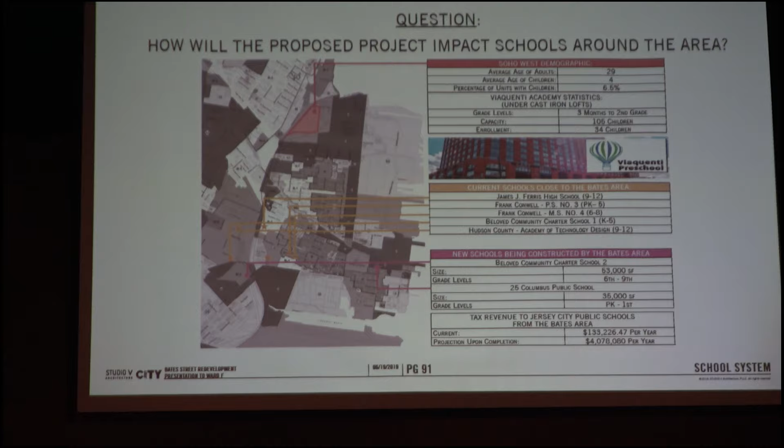So the question was, how will this development impact the traffic? The biggest concern was the off-ramp to the turnpike. If you go over to Center Street, you'd see the turnpike off-ramp and Center Street are separated by a divider all the way down to Montgomery Street. So I think the impact will be minimal.

With that said, we just retained a traffic consultant who will be performing a traffic study, and that will be an ongoing process as we move forward with this plan, with the planning division.

This next question, John, if you want to elaborate on it, you can, but I think I have the general answer. Are you incorporating all of the Bates Street redevelopment area? How are you going to obtain all of this land?

We came in a little bit late, but I believe the other property owners in the Bates Street redevelopment plan are present. There's a total of 5 of them, and MBC is the master or lead developer. So they are not going to acquire the other property owners' lands. Those developers are going to build on their own land. Did I pretty much cover it? Okay.

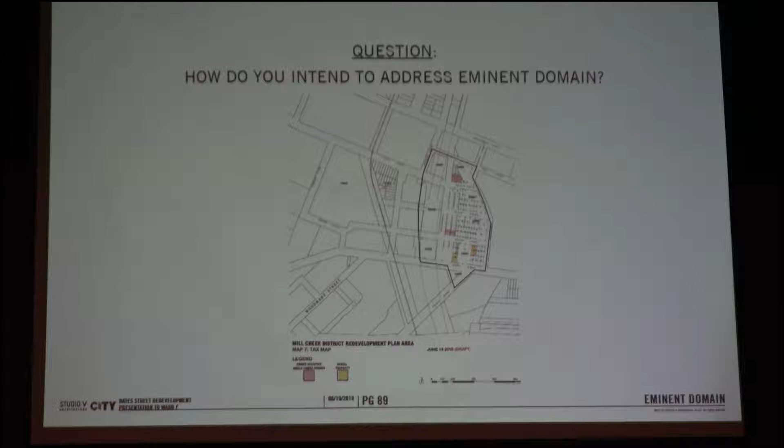This next question: how and where are you going to fix the sewage problem that affects Booker T? Is it covered under your plans for this site, along with our water problems?

Hello, my name is Jeffrey Reeves. I'm a licensed professional engineer in the state of New Jersey. I worked on the infrastructure plan that you see there. Booker T is adjacent to this redevelopment plan.

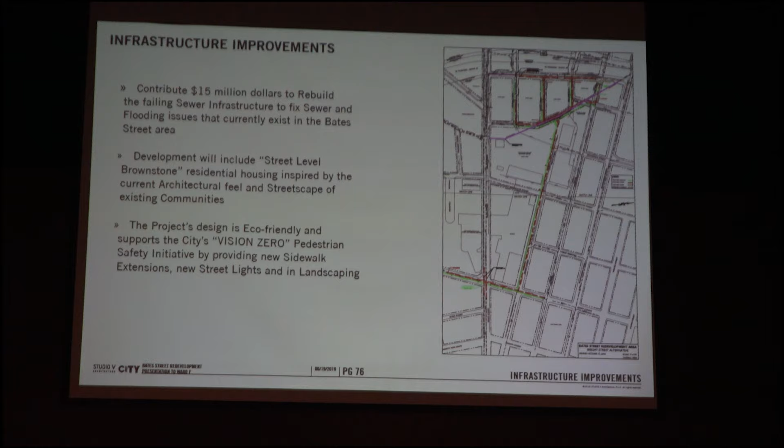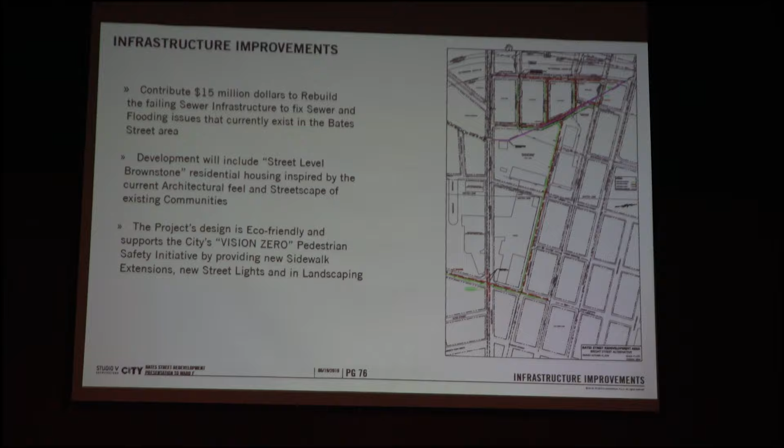I would say it's indirectly going to be benefiting, not directly. We're going to be rebuilding the infrastructure on the Bates Street redevelopment area and discharging it to the waterway, separating the system into a sanitary and a separate storm system. By doing that, you are freeing up area or space in the existing combined system that Booker T drains.

So by taking out the flow and volume in the Bates Street redevelopment plan and properly discharging that into two new systems, all of that existing volume in the neighborhood of the Bates Street development plan will free up space in the existing systems. So Booker T's system will benefit, as well as the adjacent neighborhoods to the Bates Street development plan. That's the best way I can answer it.

I believe Booker T is off that map, on the top of the sheet. So we are not impacting the Booker T roadway system. Well, as long as you fix it, okay, thank you. It's just one question.